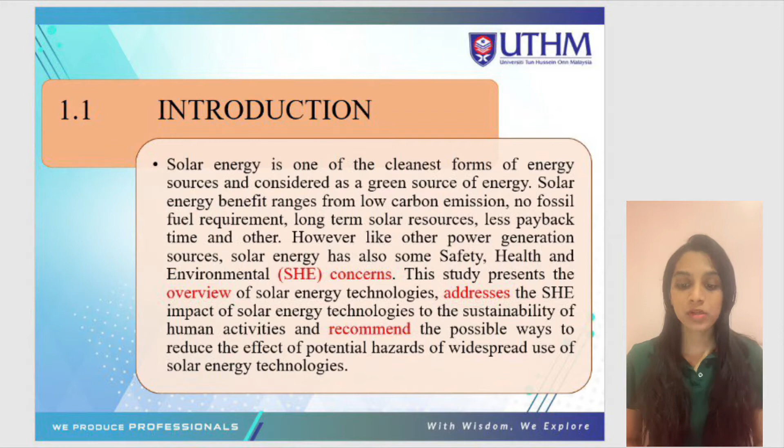Solar energy is one of the cleanest forms of energy resources and considered a green source of energy. Its benefits range from low carbon emission, no fossil fuels requirement, long-term solar resources, less payback time and others. However, like other power generation sources, solar energy also has some safety, health and environmental (SHE) concerns. This study presents an overview of solar energy technologies, addresses the SHE impact of solar energy technologies on the sustainability of human activities, and recommends possible ways to reduce the effect of potential hazards from widespread use of solar energy technologies.

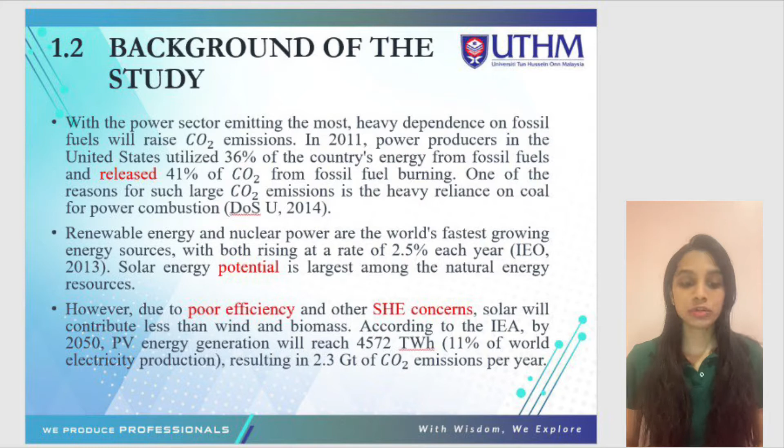Background of the study: the power sector's heavy dependence on fossil fuels will raise CO2 emissions. In 2011, power producers in the United States utilized 36% of the country's energy from fossil fuels and released 41% of CO2 from fossil fuel burning. Renewable energy and nuclear power are the world's fastest growing energy sources, both rising at a rate of 2.5% each year. However, due to poor efficiency and other SHE concerns, solar will contribute less than wind and biomass.

In the manufacturing process of PV solar cells, very hazardous elements such as cadmium, lead, nickel, and other chemicals are employed which have been prohibited by Worldwide Environmental Protection Organizations.

PV modules also generate CO2 and other GHG at some stages in their life. Pure silicon metal is used in PV panel manufacturing. Throughout the solar cell manufacturing process, a variety of chemicals are employed, and various GHG released in different chemical processes are elaborated in this study.

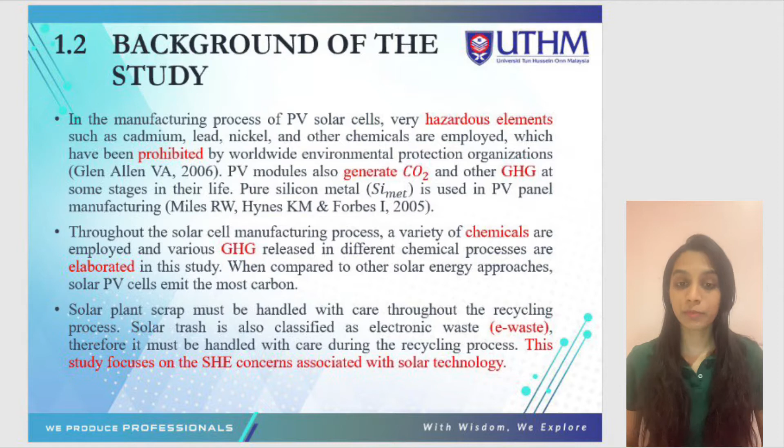When compared to other solar energy approaches, solar PV cells emit the most carbon. Solar plant scrap must be handled with care throughout the recycling process, as solar trash is also classified as electronic waste (e-waste) and therefore must be handled with care during recycling. This study focuses on the SHE concerns associated with solar technology.

Problem statement: PV solar panels do not contaminate the air while generating electricity. However, the production process requires numerous toxic chemicals which are quite hazardous from a SHE standpoint. There are certain issues following the end of a panel's projected life and throughout the recycling process. These concerns will be addressed in this study.

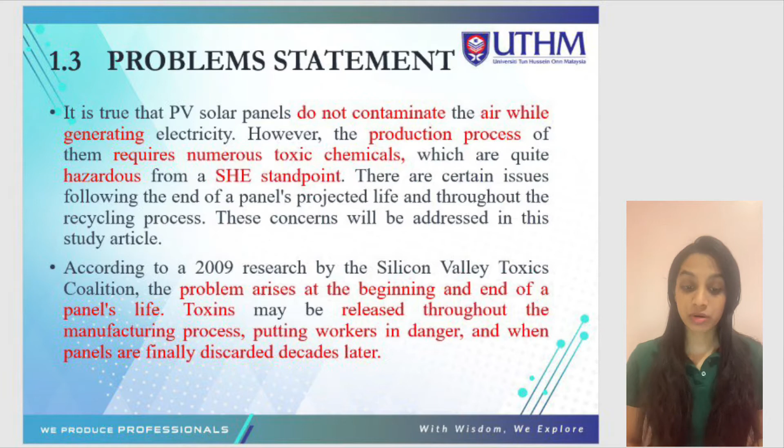According to a 2009 research by the Silicon Valley Toxics Coalition, the problem arises at the beginning and end of a panel's life. Toxins may be released throughout the manufacturing process, putting workers in danger, and again when panels are finally discarded decades later. PV solar cells contain highly toxic metals such as cadmium, lead, arsenic, nickel, and others, whose usage is forbidden by Worldwide Environmental Regulation.

Limited E-product cadmium, which is also a human carcinogen, is utilized in thin film cadmium telluride PV modules. The manufacturing process necessitates the use of numerous radioactive elements; materials used on a large scale are extremely hazardous from an SHE point of view.

Problems faced with the manufacturing and disposal of solar panels: we cannot use solar panels in large quantities to provide energy similar to that provided by a thermal power plant unless we can handle the garbage generated during panel disposal. Despite being employed in small quantities in the panel, several of the materials used in solar panels are rare in nature and cannot be reclaimed.

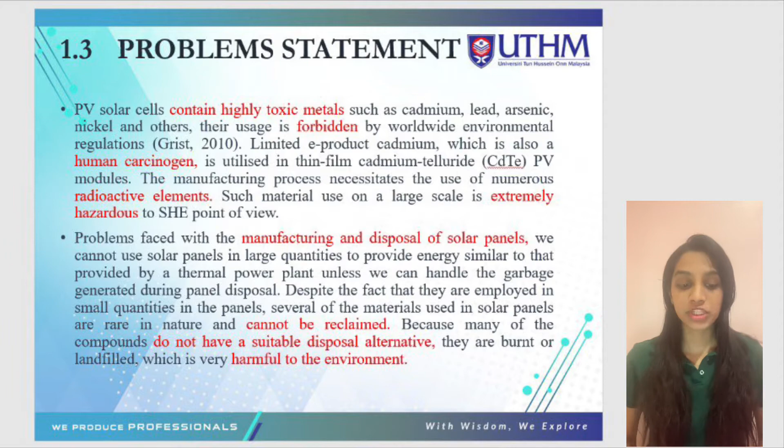Because many of the compounds do not have a suitable disposal alternative, they are burnt or landfilled, which is very harmful to the environment. In this study, there are two objectives. The first is to address the safety, health, and environmental (SHE) impact of solar energy technologies, particularly photovoltaic (PV) modules, on the sustainability of human activities.

The second objective is to recommend possible ways to reduce the effect of potential hazards from widespread use of solar energy technologies, particularly PV photovoltaic modules. The scope and limitation includes obtaining facts from reading, conducting a survey, and distributing a questionnaire.

Significance of the study: this study investigates the safety, health, and environmental effect of solar energy systems, specifically PV modules, on local residents. The global supply of solar energy systems has risen significantly due to an immense amount of untapped solar power, eco-friendly features, and the need to address potential energy fuel shortages in the near future. When compared to traditional electricity sources, solar energy has enormous environmental advantages.

However, solar systems emit GHGs, especially during the manufacturing process, and the waste produced by the solar industry is classified as e-garbage and must be treated with care. This analysis is expected to be carried out in order to lower the effect of solar energy technology on mankind, by adopting the recommendations proposed in this analysis.

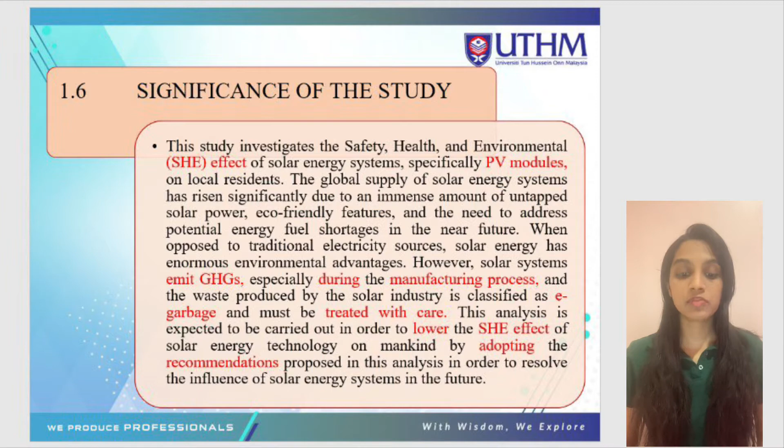In order to resolve the influence of solar energy systems in the future. Literature review: in order to understand the study, we need to understand the definition of the topic, which is solar energy and safety, health and environmental (SHE).

Solar energy is the use of the sun's radiant light and heat to power a variety of ever-evolving technologies such as solar heating, photovoltaics, solar thermal energy, solar architecture, molten salt power plants, and artificial photosynthesis.

Safety, health, and environment: safety means arranging actions and procedures for identifying workplace hazards and reducing accidents and exposure to hazardous substances. Health means the development of safe, high-quality, environmentally friendly processes, working techniques, and systematic activities that minimize or reduce the risk of damage to people's health.

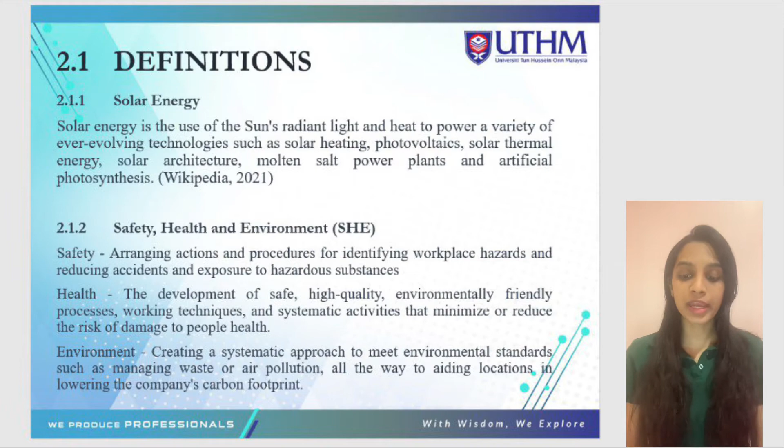Environment means creating a systematic approach to meet environmental standards, such as managing waste or air pollution, all the way to aiding in lowering the company's carbon footprint.

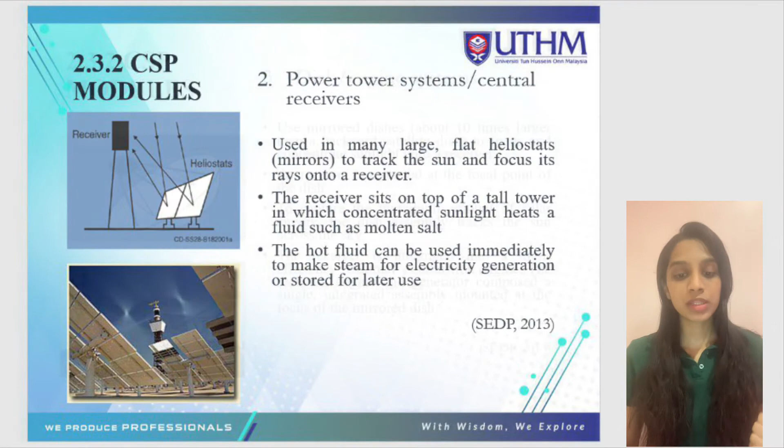Solar energy technologies are divided into two: photovoltaic modules, known as PV, and concentrated solar panels, known as CSP. There are three types of PV modules: monocrystalline, polycrystalline, and thin film. And there are three types of CSP modules: trough system, power tower system, and dish or engine system.

Life cycle assessment for technology comparison harmonization. There are five life cycle comparison harmonization metrics, which are carbon footprint, energy payback time (EPT), energy payback ratio (EPR), life cycle land use (LCLU), and levelized cost of electricity.

Now let's talk about the negative impacts of solar energy. To understand the influence of solar panels, consider their life cycle, which may be divided into three stages: manufacturing, operation, and decommissioning. While photovoltaic solar panels do not contaminate the air during electricity generation, the manufacturing process contains numerous toxic chemicals which are very hazardous from the SHE standpoint.

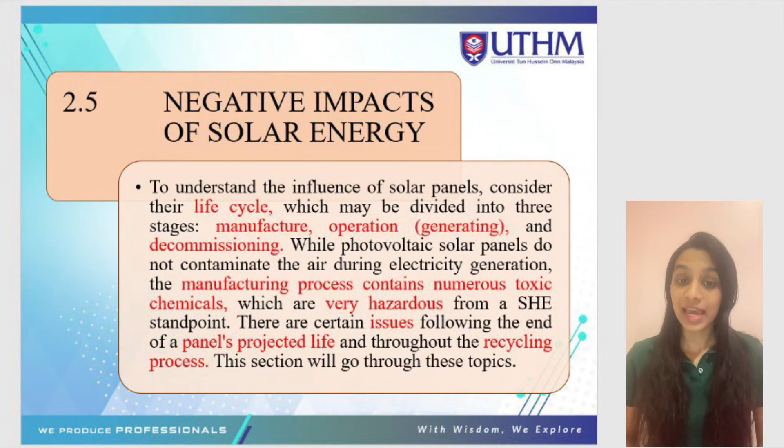There are certain issues following the end of a panel's projected life and throughout the recycling process. This section will go through this topic. The first negative impact is the cost of land.

Large-scale solar farms need a large amount of area for installation. This problem becomes particularly acute in nations with already high population density, such as Singapore. It is difficult to find affordable land in such nations. The high cost of land will also have an impact on the cost of power per unit.

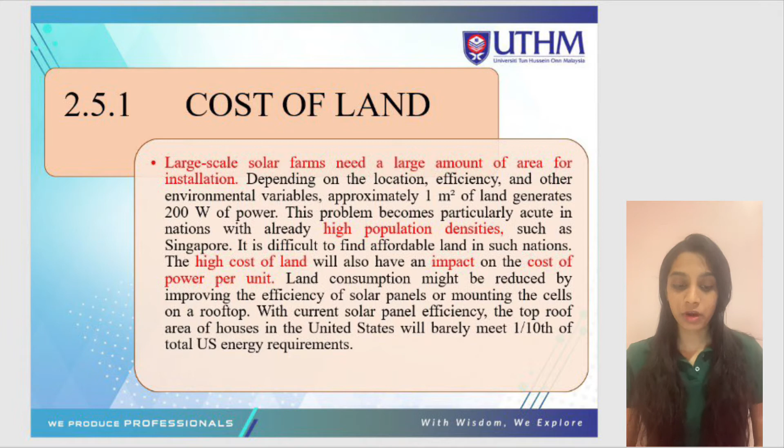Consumption might be reduced by improving the efficiency of solar panels or mounting the cells on rooftops. With current solar panel efficiency, the rooftop area of houses in the United States will barely meet one-tenth of the total US energy requirement.

The second negative impact is toxic chemical content in solar panel manufacturing. This is the most highlighted impact in this study. Various chemicals are employed in the production of solar panels, notably during the extraction of the solar cell.

Cadmium, for example, is a very poisonous metal that is utilized as a semiconductor material in cadmium telluride-based thin film solar cells to convert solar energy into electric energy. Cadmium dust and fumes are classified as carcinogens by the National Institute of Occupational Safety and Health.

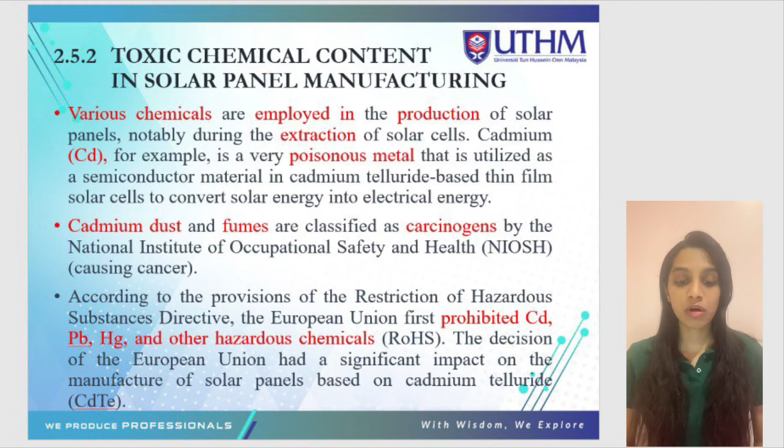An accident caused by the discharge of dangerous chemicals into the water system in September 2011 sparked local outrage, eventually leading to the company's closure. Due to the usage of hazardous chemicals in their construction, PV panels represent a concern to environmental pollution if not correctly disposed of after deactivation.

The unintentional emission of heat transfer fluid, water, and oil from parabolic trough and central receiver systems might pose a health risk. Central tower systems have the ability to concentrate light to levels that are harmful to one's eyesight.

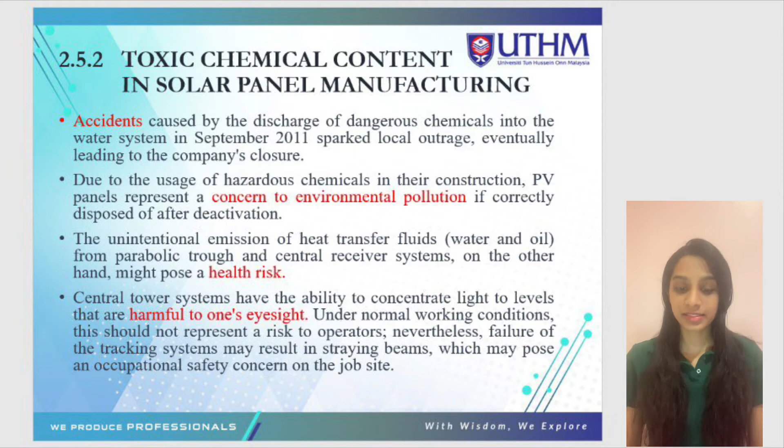The third negative impact is ecological impact. Solar energy installations have a direct influence on local ecosystems and the surrounding environment. Large-scale solar farm development necessitates land removal, which has a negative impact on native plants, animals, and causes habitat degradation.

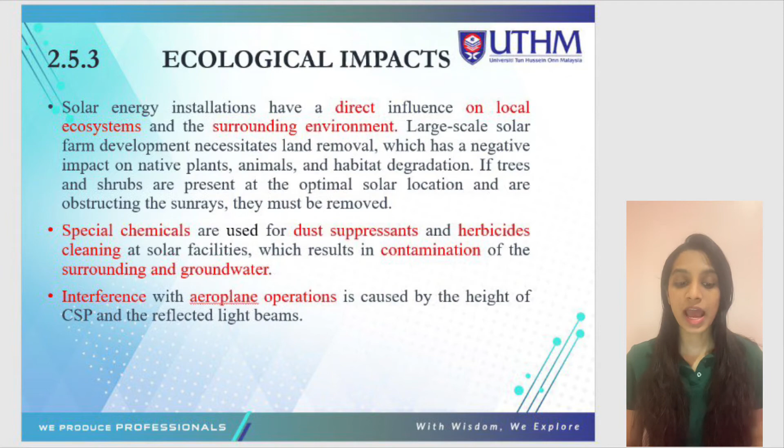If trees and shrubs are present at the optimal solar location and are obstructing the sun's rays, they must be removed. Special chemicals are used for dust suppression and herbicide cleaning at solar facilities, which result in contamination of surrounding soil and groundwater. Interference with airplane operation is also caused by the height of CSP systems and the reflected light beam.

The fourth negative impact is decommissioning and recycling of solar panels. This is the final negative impact. After its anticipated life of 20 to 30 years, solar modules pose several SHE issues.

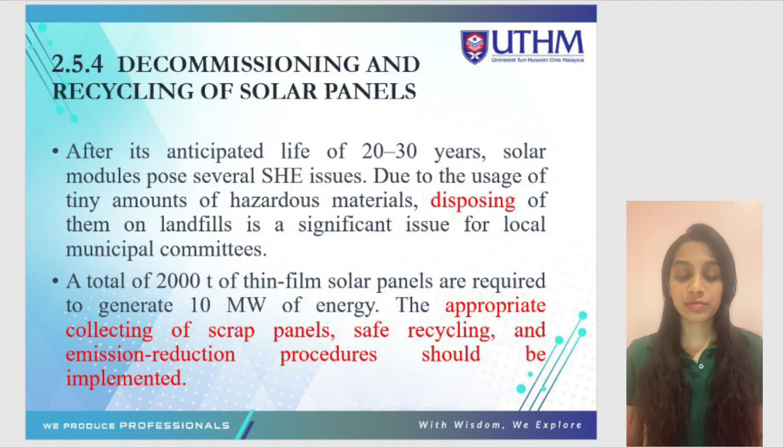Due to the usage of small amounts of hazardous materials, disposing of them in landfills is a significant issue for the local municipal committees. A total of 2,000 tonnes of thin film solar panels are required to generate 10 megawatts of energy. Appropriate collection of scrap panels, safe recycling, and emission reduction procedures should be implemented.

Solar energy imposes impacts towards human beings as well as the environment. In order to minimize the SHE impact of solar energy systems on local inhabitants, this study is crucial. The outcome from this study is to achieve the most feasible recommendations to be incorporated, such as innovative production technologies to improve PV module efficiency.

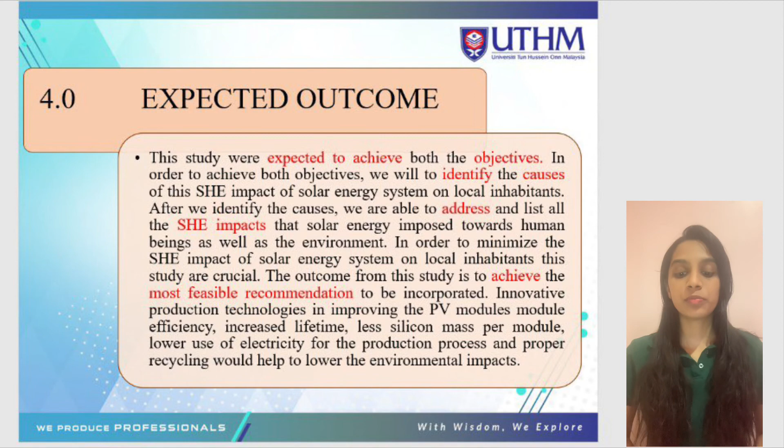These improvements include increased lifetime, less silicon mass per module, lower use of electricity for the production process, and proper recycling, which would help lower the environmental impacts. In conclusion, the safety, health, and environmental (SHE) impact of solar energy systems on local residents was examined.

The global production of solar energy systems has risen significantly owing to a large quantity of unused solar potential, eco-friendly qualities, and the need to overcome probable energy fuel shortages in the near future. When compared to traditional energy sources, solar energy has enormous environmental benefits.

However, solar energy emits GHG, particularly during the manufacturing process, and the trash generated by the solar sector is classified as e-garbage and must be treated with care.

Innovative production methods that improve PV module efficiency, longevity, reduce silicon mass per module, use less power in the manufacturing process, and enable appropriate recycling will all assist in reducing environmental consequences. Therefore, this study is crucial and should be carried out in order to identify the feasible recommendation.